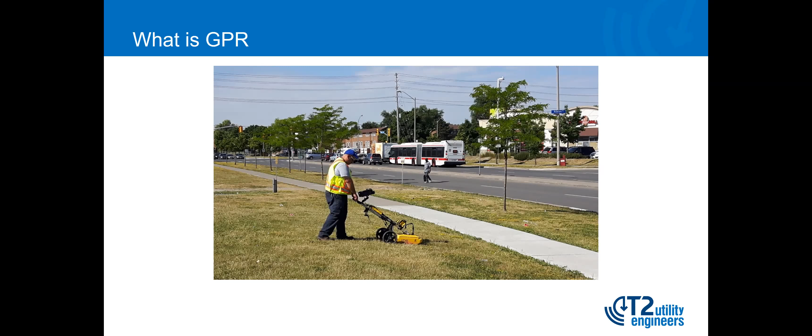That's what we've used in the past, and we still use it to this day. They're very good, there's all different types of models, they're all changing all the time. But typically they're a push system where the data is collected and usually interpreted real time, right in the field. So as you're pushing, if you saw something, the data would be interpreted there and looked at right in the field.

So like I mentioned, it goes through and does metallic and non-metallic infrastructure, natural man-made underground features it can pick up, which would include utilities, which are a big portion of what we do, but also storage tanks, rebar, sinkholes, voids. If you're looking for water table or any environmental contaminants, buried artifacts, grave sites, pretty much anything that's subsurface or in the shallow subsurface, we can do.

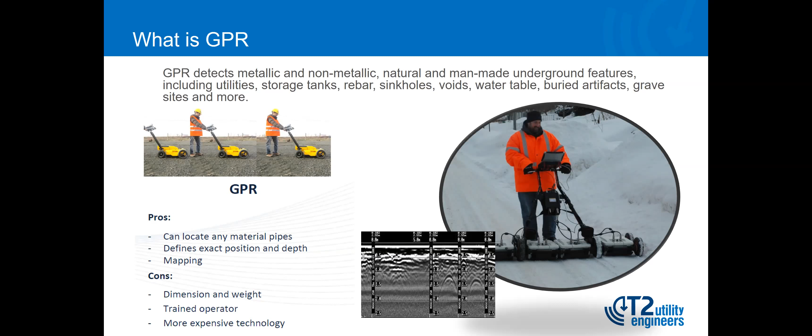So this is the standard 2D GPR that we'd use on a day-to-day basis to help us find utilities or underground infrastructure. I'm just trying to replicate here some of the fundamentals of GPR, because we utilize this all the way through for our single channel, multi-channel, and mapping purposes. I wanted to give everybody a bit of background on GPR in case you hadn't heard of it or seen it before.

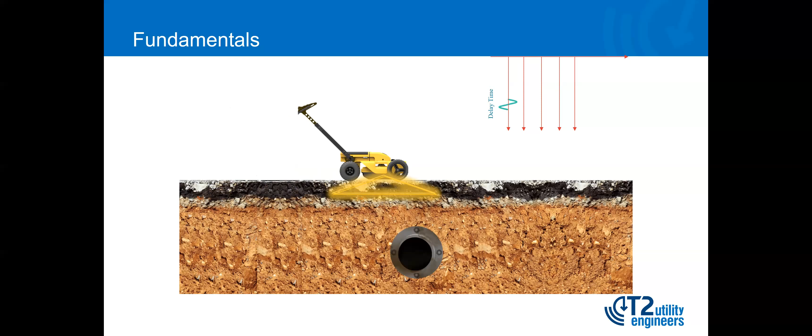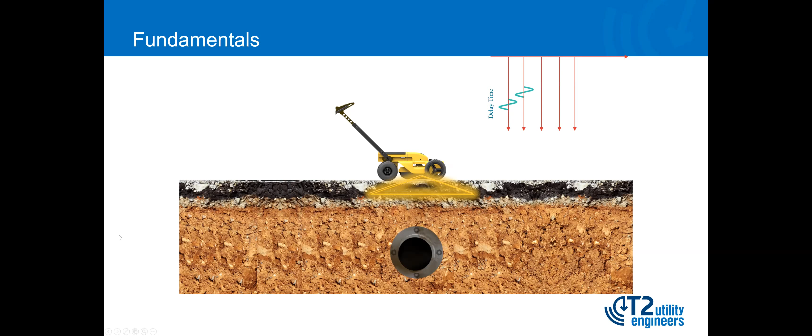As you can see, the typical push model is you push the GPR system across the ground. Sometimes it's very easy on flat surfaces, but other times it can be very difficult. As the transmitter sends out its signal and the receiver receives the reflections back, as you slowly come over the utility or whatever you're looking for underground, it creates these waves and markers on the screen. As you keep going back and forth pushing the GPR, you eventually try to see these hyperbolas, and that's what we're looking at with GPR data.

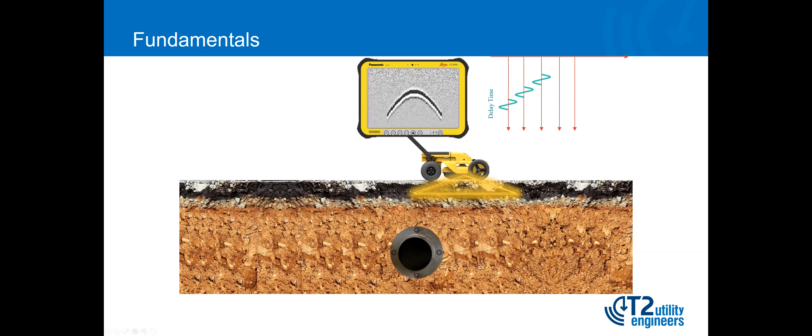So when we go back to what we would use as standard GPR in the field on an everyday basis, it really comes down to the person utilizing the GPR and their interpretation of the data in real time. These are great if you need to do utility locates or help find utilities quickly in the field. As long as the conditions work for it, they're great for that. They're quick, you can pull it out, push it along, and try to map out the utilities. That's the data you're looking for in the middle of the screen.

It's these upside down hyperbolas, and believe me, if they all looked that nice it'd be great, but typically they don't. So it really comes down to that interpretation, and it's always been a bit of a concern when mapping bigger areas or in roadways where you need time for that interpretation in between cars, traffic, and even pedestrians around you.

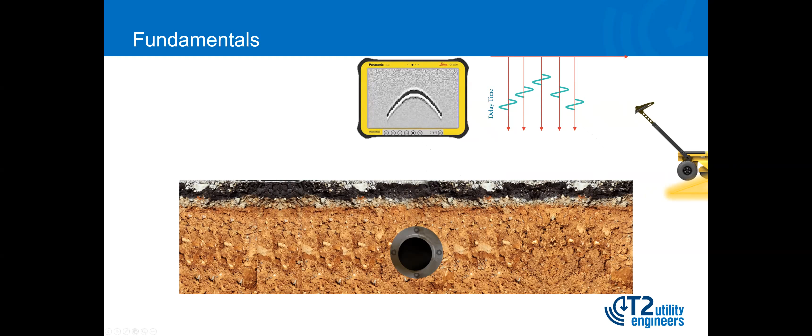So again, here you can see some of the standard GPR data that we look at in the field when you do it real time. This is great data, and I'd love to see this data all the time, but that's not really the case. To show the point, if you're doing the interpretation in the field real time, you need the time to look at it, do your interpretation, move back, and figure out where it is that you're seeing. Would all of these be utilities? Could they be some utilities, some buried infrastructure, rocks, or anything in the subsurface that could give you that reflection? All of that can give you this data.

So when you're in the field trying to do it real time, it can get quite difficult and time consuming to map a bigger area when you're out there doing it. This is the data we're looking at, what we call GPR data, so you all have an understanding of what it is. Again, it comes back to it being a bit of a slower acquisition with the normal push GPR systems. It's good for certain applications and in certain areas, maybe smaller areas, but it's very prone to that interpretation. Most of the time, I'd say the majority of these systems out there are used for utility detection.

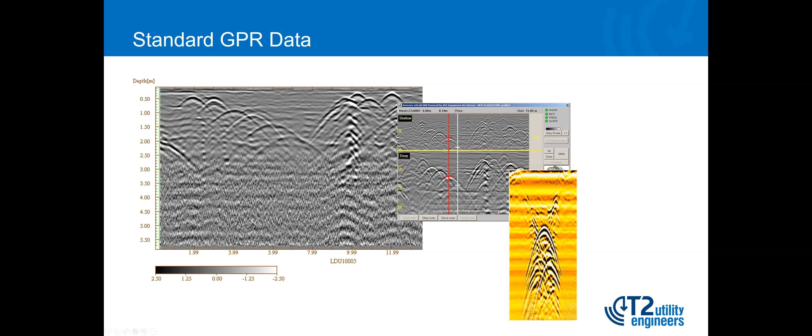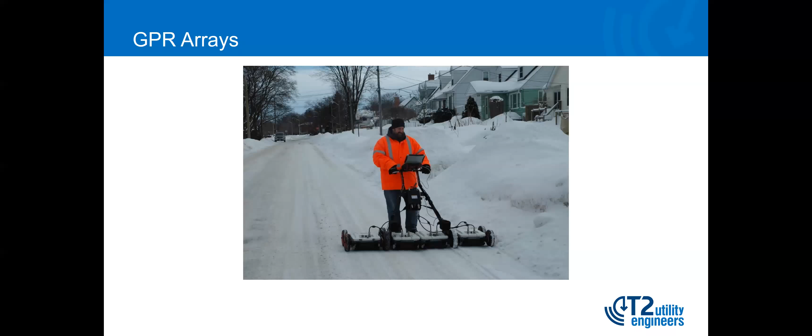You can see we did it in the winter. These systems don't really like the winter temperatures very much. I think back on this day, our batteries froze, the screen froze, and everything else froze on us, trying to put it to the limits. But we're trying to take it a step further so we can really start to map this area quicker and have more information coming in.

And again, here it is in the summer, same idea. We're trying to expand the system into four systems to collect more data, make it more efficient in the field, and see what we can get with it. So this is us moving from the single channel, the smaller systems, more into an array system so that we can collect more data. And from here is where we're going to go now into the multi-channel.

But I just wanted to give you that bit of background information on GPR. So when I say GPR or transmitter receiver, you have a background in the information I'm going to be utilizing here. If you have any questions or concerns, hopefully ask them at the end or reach out to me and I can help you out, but I didn't want to drone on with just the background information of GPR in general.

I want to get into what makes it exciting for me, going into the more multi-channel and how we're really utilizing this now on our day-to-day projects, and maybe really where it can help out on different right-of-way information and what we can do.

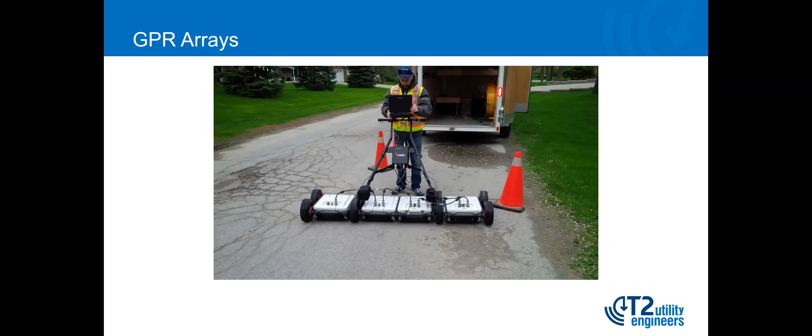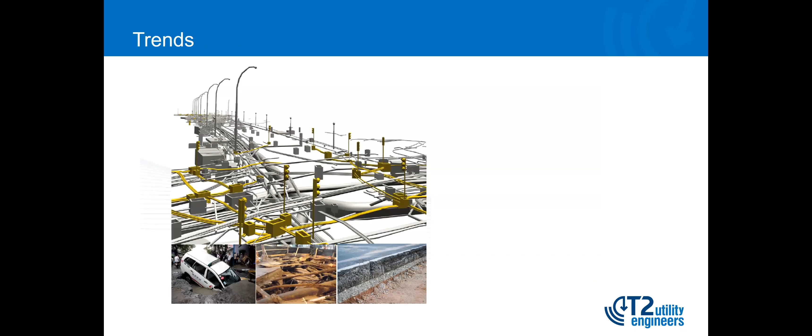With the single channel or the smaller systems, it's great for real time. You can mark it in the field, put paint on the ground, bring that data back, and maybe interpret it a little bit, but at the end of the day, it's really just a real-time system.

By us trying to move to these arrays or these bigger multi-channel systems, it really is going to help more with as-built situations where we're looking to find all pipes and cables, not just a singular one, not trying to find this plastic water main that's out there.

We can definitely use it for utility planning, road maintenance, and renewal. So if you need to figure out if there's voids, how deep the road base is, or if there's a concrete road base or anything like that. It comes down to safety and if there's any cavities in the road, and if there's any other underground assets and conditions.

This is kind of where I like to go - there's a lot of abandoned utilities out there, abandoned structures, even infrastructure like old train tracks, tanks, or building foundations that have been buried. All this type of stuff could be out in these easements or right-of-ways that we have, but we don't really know about it. Our typical electromagnetic day-to-day locating techniques maybe will not find them, or they'll find them but it's very hard to interpret what this data would be.

So we're trying to take it from the one side to the other. As part of a process, as part of a tool in our toolbox, we're really trying to bring out a different area where we can take this information.

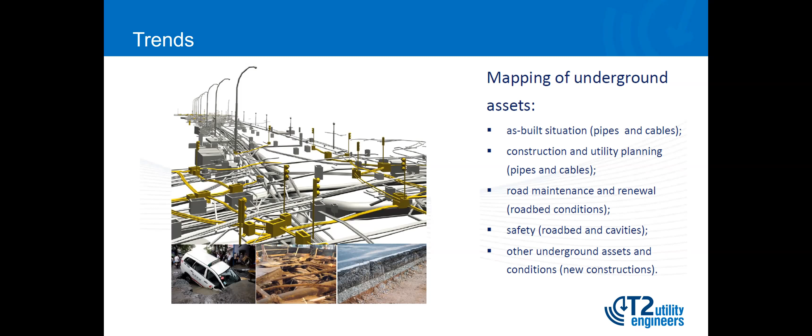So going from typical GPR and that small system we push, to what is multi-channel GPR, MCGPR as I might call it. What is it? We've gone from this small system to maybe a bit of an array, to now a system that is a tow-behind, big system. There are different variables out there, smaller systems you can push, but really we're trying to get a system big enough that we can collect all this information as we're traveling down the road, in one pass.

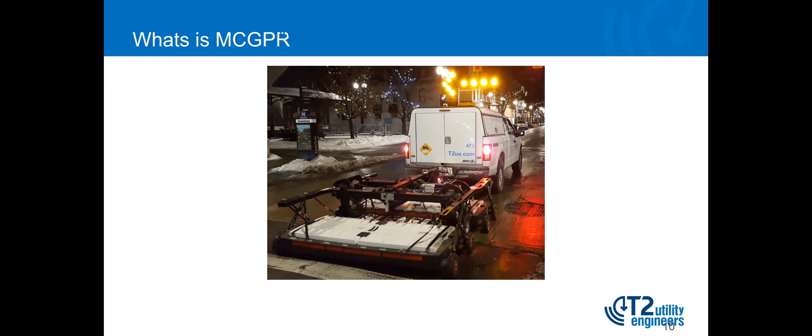So this system you can look at here is a multi-channel system. It's got 40 channels, where the typical small push ones are probably 1 to 2 channels, and it has different frequency antennas—200 and 600—collecting data in both directions. So as this system drives down the road, we're collecting data in that full swath with multi-frequency antennas, as well as in different directions.

The whole idea is for us to collect as we're going down the road, or across a piece of land, in just one pass. It's collecting in both directions for us, and then we're done with it. We can turn around and collect the other side of the road. So from an efficiency standpoint in the field, it definitely picks up—we can collect a lot more data a lot faster, and we don't have to go back and forth. With the older systems, we'd have to go back and forth parallel to the road and then across it. So something we can now collect in maybe an hour might have taken us days to get the same data.

So those are the bigger systems. Again, you can have GPS connected to them, which allows real-time acquisition of where you are. It lets you take the data and put it into GIS, and from GIS you can put it into CAD. We can relate it to different datums, into KMZ files—we can do a lot with it as long as we're collecting this. So there's a lot of information going on and being collected at this point.

And just to show you a smaller system—this is a smaller, again multi-channel system, I think 32 or 34 channels, again with different frequencies within it. This one's a tow-behind as well, and you can push it, tow it, and collect data with GPS and everything else. So it's the same idea.

It depends on what we're going to do. Maybe some of these we'll use on the roadway or big land areas, where these smaller systems will get us closer to buildings, or on sidewalks, or in different areas. So again, everything comes down to what the scenario holds and what you feel you need to use for that scenario. But the whole idea is this array system with different multi-channels and multi-frequencies collecting in all different directions.

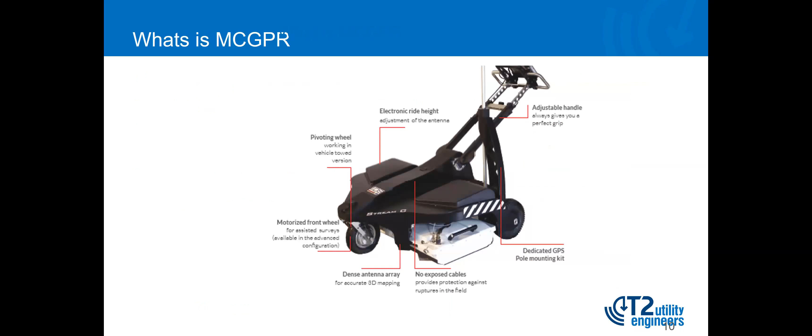So again, what is multi-channel? It's like I've talked about—arrays of multi-frequencies, I've got 200 and 600 here, but there are many others out there. It's a massive array compared to that one single push system. There are different types that can be towed and pushed, and the key is that you're gathering a ton of information quickly, and you only have to do it in one direction, where in the past we'd have to collect data in two directions or multiple directions. Now we can just travel down the road and collect data as we go.

The one system, the big system you're looking at, is almost the width of a vehicle. So to do a laneway of road, now you're maybe doing 2 swaths down that road, where we'd have to do multiple passes in the past to accomplish that.

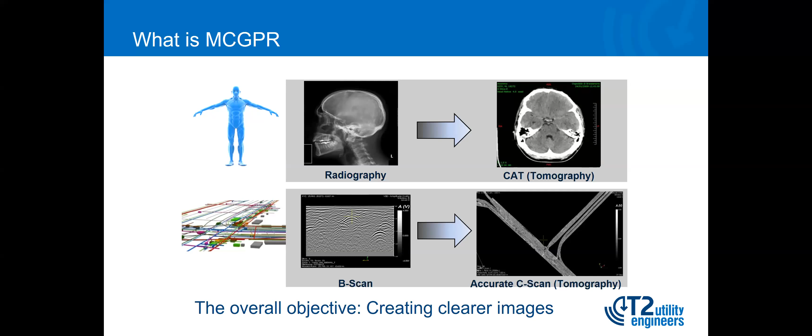So like I keep mentioning, we're really trying to take it from the 2-dimensional world, or the 2D of what we normally collect, to the 3D. And what we can do with these array systems, it really comes down to the collection part of it, which is fairly simple. It's a big system and you have to understand how to put it together, but the collection of the data, because now you're not really doing the interpretation in the field, it's not real time, you're now doing all this data post-processing.

So that's where now there's definitely more time in the office than what there used to be, but the product itself is pretty amazing. Now we can go from these two-dimensional ideas all the way through to three-dimensional pipe detection or structure detection as we go, and we can create these overall tomographies as we do it.

So we're still utilizing GPR data itself. It hasn't changed. We're still looking for those hyperbolas and trying to connect them together, but because we have this multitude of data, it's allowing us to create these better tomographies and this better information, actually produce this 3D information that we can then use in CAD drawings, we can use in KMZs, we can use it anywhere to create what we need. We can even put it into a GIS program for certain things.

So it's really working out well, is getting all this information. And what I mean by that is what it allows us to do. Again, this is all data interpretation that we're still utilizing from these multi-channels. But now we can start to pick points.

You can see the top version is the data itself. So we're still using GPR data. But with the software and the processing software, we can start to pick these points, put information, start throwing 3D and elevations as we go. So you can see here, this is a utility that's coming to a cross street. It's dipping down to get through the intersection, then comes back up on the other side. And we can start to do this and actually export this data as a 3D model.

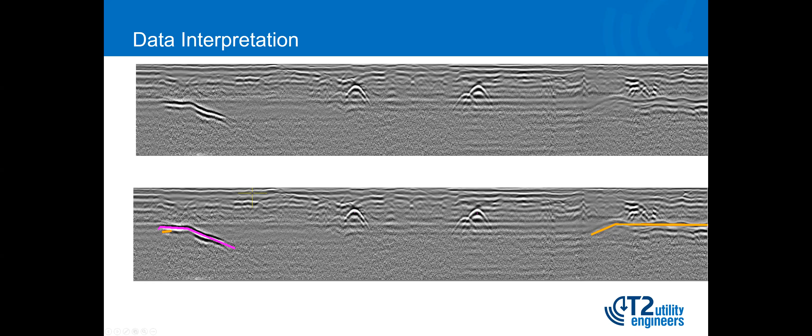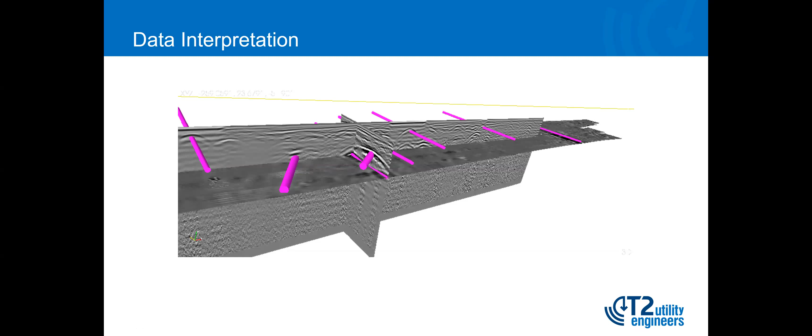So you can see here just a basic set of information. But now we can start picking out pipes or different utilities and actually exporting those picked points out into something that's very usable, into a CAD file or into whatever information that you need to utilize it in, and really helps with the planning and processing to really know what's out there to gather that information. So it's really come a long way with that.

If you're doing a complete SUE investigation, it might be that you'd want to use the multi-channel to help out. Especially it allows you to get out into live traffic. You can collect data day or night. Vehicles and that type of thing don't really affect it very much, so you can really get out in this live data, this live traffic, and be safe. But there might be some other ideas where you might not take it this far. But then if you're going right through to a 3D model, this really helps correlate the data and bring it back if you're doing test holes and that whole type of thing.

So that's kind of the data set that you would see and utilize to create different things, and I'm going to slowly go into that now. So what are we going to look at? What's the kind of data that we can receive from it, and then really what we can do with that data.

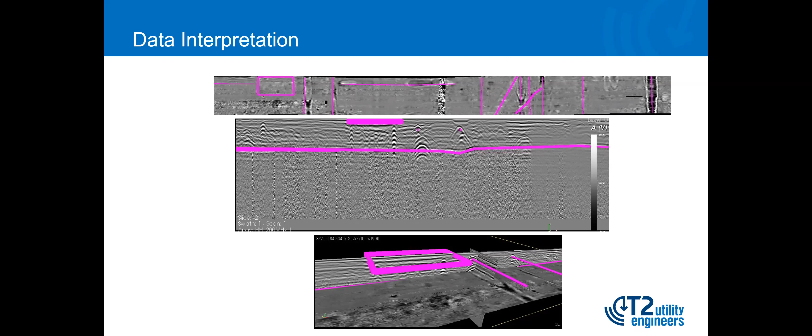I'm just going to jump in here. I feel bad because I can't see anybody's faces or understand how it's going, but I've got to keep going through here and hope for the best on this.

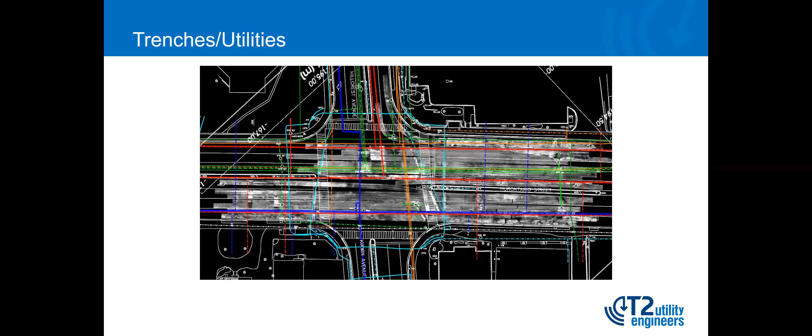So you can really start to pull this information together and see it - it kind of gives you that big picture idea of what we're doing. I'm trying to now relate it back to some live examples of information that we do. From those last couple examples, it really helps with utility specific information and what we can do with it. And how that works is you can see on these ones, again, we've overlaid a base file.

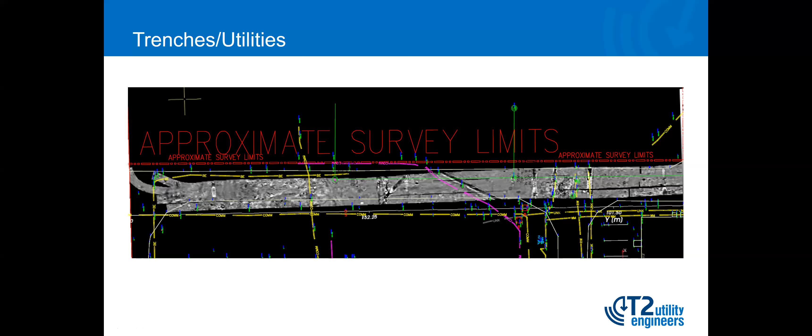We have existing utilities and records, and now we start pulling the information in. You can see we just got an image, it's georeferenced correctly, and a lot of the utilities we did get, no problem. But now we can start to see areas where we didn't see these ones, and maybe we can realign this based on the electromagnetics. Maybe something was causing a change in the electromagnetics there, our normal pipe and cable locators. So now we can really start to develop and key in on showing the full potential of what's out there.

So then it's the same image again, but we're adding in different lines. We're confirming locations, maybe repositioning locations based on what we know, adding total areas that we had no idea about, non-conductive, abandoned utilities that are out there, and taking it from there. So from a utility side, it really is a tool that helps us to develop this overall map of what's there and what we can do with it. It's kind of key for us on that.

So that's the one part - it can help us with our utilities, abandoned or alive, in our areas and what we need to do. Another big thing though, what I find with the multi-channel, or what it's doing with these array systems, is the non-utility infrastructure that it's finding.

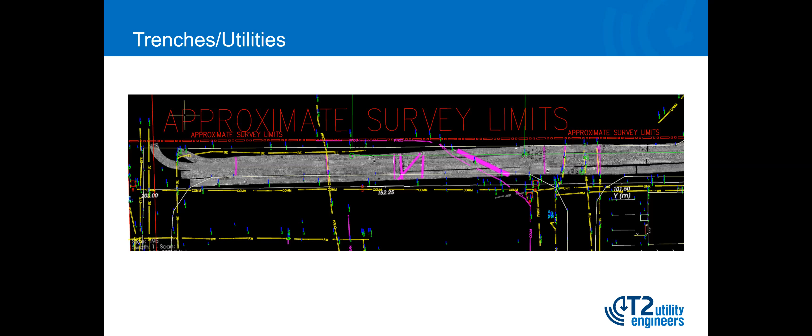So one of the things I'm a little proud of on the different jobs I've done - and it's really nothing to do with me, just by chance and luck that I'm in the right spot at the right time - is really looking for tracks. It's funny with the amount of jobs I've done over the years, and looking back and doing research based on the information I find, is how many locations or cities have at one point in time or the other had old trolley tracks that over the years have been buried and abandoned and just paved over. At the point in time when the road went in, they didn't feel it was needed to take out. So you start to get this information.

So here's a job that we did, and it's just a little section you can see in the middle, and I'll put it on. Again, the same thing is we can bring this image in - there's a topo that goes with it. And now we can start to see that they've had to do some work on one side or the other, but there's a set of tracks that are buried within the roadway.

It might - if you don't do anything in that roadway, that's fine, they can sit there, they're not causing voids or anything. But once you go and start to dig or come across those, it's going to be huge downtime and costs at a later point. So knowing that they're there up front, maybe you totally change your design or plan.

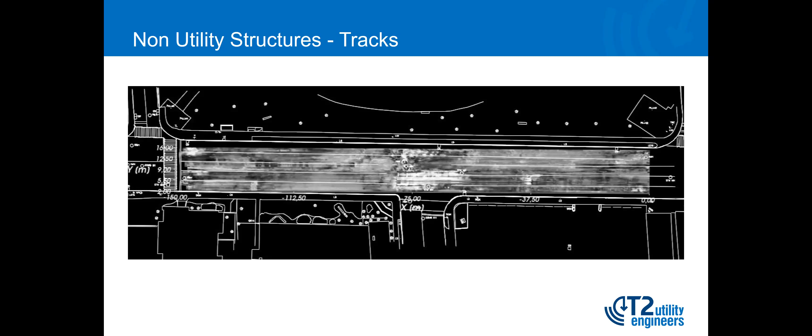So again, just going through some different ones - here is a section where you can definitely see the tracks. I think in this one we can see the ties, and the track itself was still there. It related back to when we were doing our normal electromagnetics, because we had a couple of unknowns where the actual tracks themselves were as we went through, but we would never have known the beds, or even if that was a railway track at that point or a trolley track.

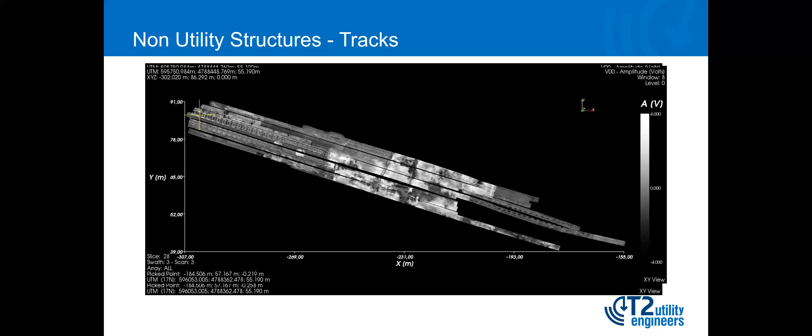And again, here you can kind of see they're on one side of the road versus the other, and all this information can be overlaid within the drawing. So I'm just putting through the depth slices, and then what we do is bring that image right in and put it on top. So now you can see there was definitely trolley tracks in the middle of the road - you'd never know that going out there now.

And when they put the cross street in, they dug them out and removed them, but they didn't have to remove the other portions of it. So finding this information when we're out there is really key. And so where I said in the beginning, I've been lucky to be on the right job at the right time - there's probably more of these out there than we even hazard to guess.

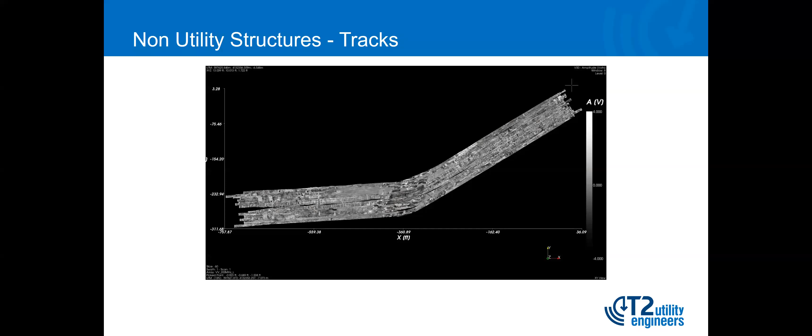But you can definitely see, again, here's tracks right in the middle - they're going right down, you can definitely see them. They're still even over top of the big culverts and bridges they have in the middle of the screen there. And then when it goes out, they've got them there.

So now they know there's an upfront cost for the removal and disposal of these tracks that they would never have known about from any design or planning point of view, other than if you've got someone, say Fred, just retired, who remembers the trolley tracks are there. But the majority of the time, people don't realize they're still there under the ground.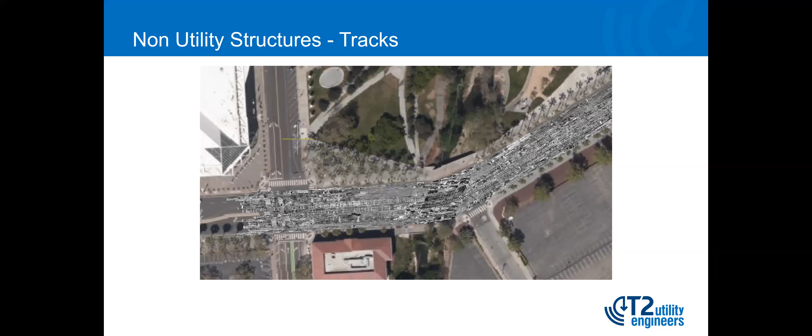So this is just one last one I'd like to show. I found the two sets of tracks, no problem. You'd never know this. I was doing some research because I like to find out for myself, and there's an image of the same area showing it back in the day. They even used horse-drawn trolley tracks, and that was the setup - that's what we're actually seeing in the picture.

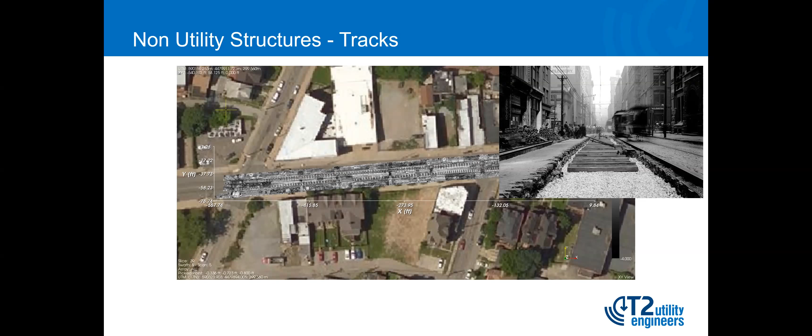So even with the multi-channel now, it's allowing us to create these maps, these overall drawings that really dictate and show what's out in the middle of these roadways or right-of-ways, to really help us plan that going forward, so we know up front.

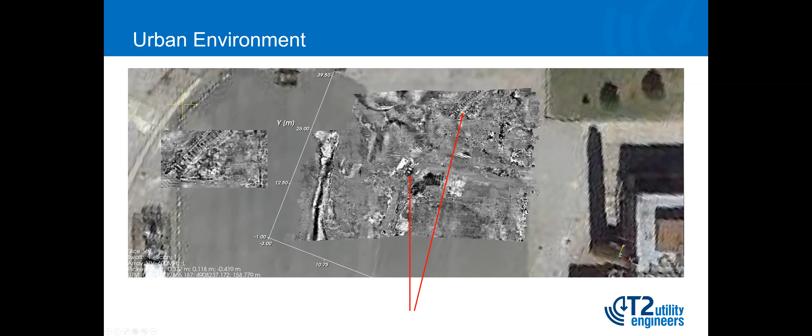This is one that was very interesting to me. I gathered a lot of data that was given to me. It's actually mapping old cemeteries that have been in place that maybe have been removed or we're not sure of. With typical GPR, the amount of time it would take to collect this data would be substantial, where now we're down to hours to collect the data and then process it. So this is just one instance, for example. We do quite a few of these, trying to map out old graveyards.

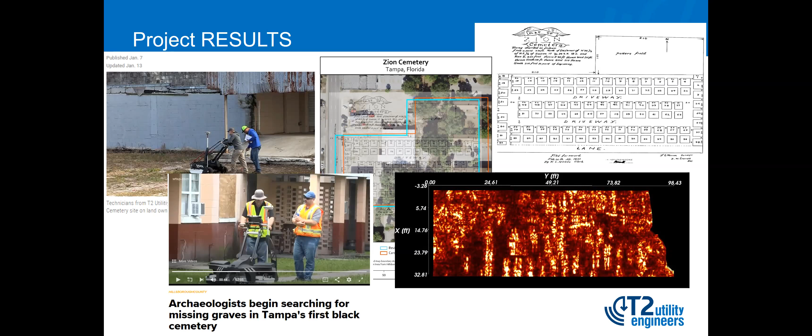This is on sites where there's buildings, or over the years things have changed, and infrastructure has been built up all around because people didn't know it was there. Throughout time, they figured out there's a location, or maybe something going on here, maybe we should look. So we're utilizing the multi-channel and then actually putting it in with LiDAR, trying to develop full models that people can use.

It's pretty amazing what you can see and what you can get from this information. I always feel weird doing those old gravesite ones or cemeteries, because it's just always a little different - if you find it, it's never good. So it's a different situation.

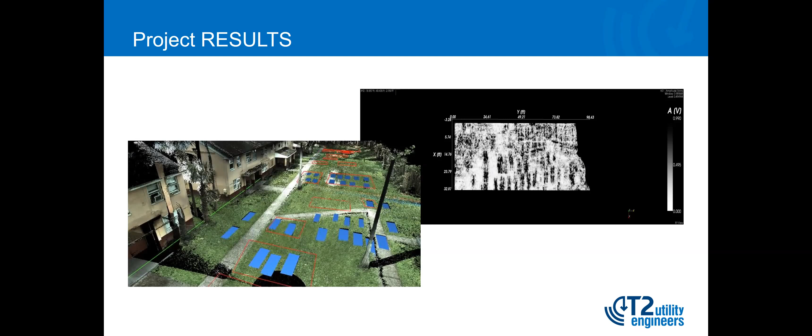And I'm going to leave on this one. This is a whole project I'd like to go through. It's data that was collected for us actually down in Vegas. And of course Vegas is always lights and showy, but we were able to get a lot of good information from this one.

So that's why I like to show you this, let's be honest - maybe not so much now during our COVID era, but during normal times, the amount of people traffic, foot traffic, vehicle traffic, just everything going on down in Vegas was really hard to figure out what we were going to do. So we were there to map everything that's in the right of way. You start off with the electrical, do your records research, do your electromagnetic, typical pipe and cable locating.

But it's very hard to figure out everything that's in there. You're having to go at weird times of the day - the amount of people and vehicles made it unsafe to try to do that. So that's where I go back to what I was saying before - you almost focus in on what you know is there versus really trying to look for everything that's out there.

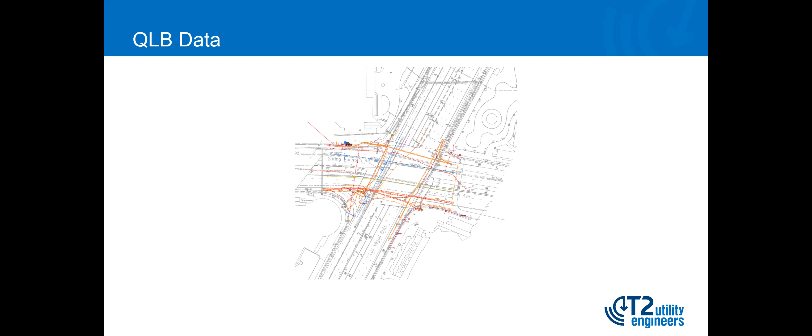So then we brought in the multi-channel and we thought, okay, how do we make this better? So again, the same idea - here's what we did in the past. It's a huge intersection, I think it was like 6 lanes in either way. So quite a few paths to get it, but it wasn't even a night of collection, it went fairly quickly for us. We were able to collect the data, so it just shows the outline of the collection areas that we went.

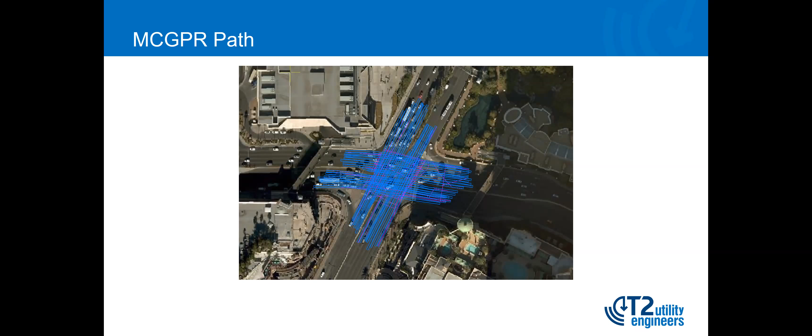Trying to pull this all together as information to be as safe as possible. So now it's the same intersection, going back to those depth slices that I showed you earlier. As you go down through, now you can really start to pull the information together. I'll probably try to run this twice, but you can see these are different slices going down through the earth, if you want to say, at different depths. You can see different utilities coming through, different structures, different abilities to see information - a lot of information that we would have never got or received before.

And what we started to figure out is there's a lot of abandoned infrastructure in Vegas. They just kind of put in new, and I didn't think there would be much in this area because typically in Vegas they put a lot on the side streets, not down Vegas Boulevard, but over the years a lot of information went through.

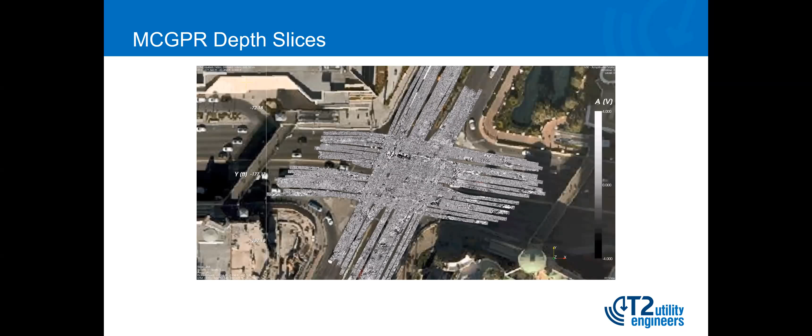So this is just one component of what we developed to help us pull these drawings together and get this information. You can see here, we start to pull this information together and it really gives us that overall map of the area utilized with our pipe and cable locators, because that allows us to depict whether this is a water main, a sewer, or a gas line, whereas with typical GPR data, we'll never know what it is. We would just know that there's something there. So it's definitely a tool to use hand in hand with it, which allows us to get through.

And then the end product is, this is with QLD with the record information right through to our QLB and the multi-channel. You can see there's a lot of information that we never would have even known was there from beforehand.

Just based on the pipe and cable locator and the records information, our end product now as we put it out shows all the information we received from the pipe and cable locators, plus a lot of unknown information we didn't even know was out there, but we were able to find now or put through, so further investigation can take place to help with that overall deliverable.

So I've hopefully taken you through single channel, the normal 2D interpretation in the field, right through the multi-channel, and how it's really not all about utilities. It definitely helps with that and what you're trying to find out there, but it really helps when trying to find all the unknown structures, like everything from tanks to graves, to abandoned utilities, abandoned infrastructure, just even to garbage and debris. It really helps bring that all through.

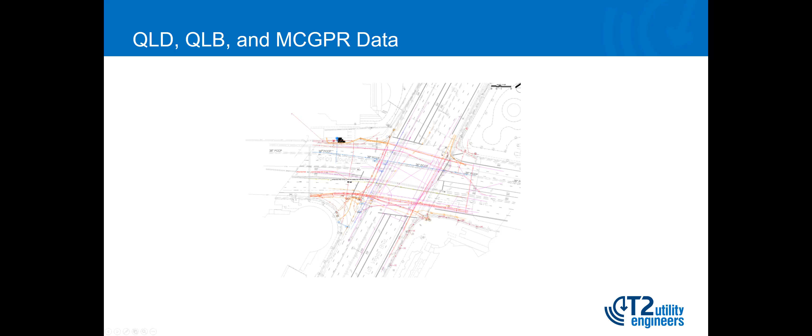So hopefully I was able to get through that for you today and answer some of those questions. Like I said at the end, some of the benefits we're finding with utilizing this information is it's a great double check of information. You can put those screenshots or depth slices right on top and start to QC whatever it is you're looking for, from tree roots right through to utilities.

It'll help you align and further find stuff that was maybe never found in that base investigation. It's an independent evaluation - what I mean by that is it's not biased, it's not the person in the field. We're just collecting the data, and then we can do the interpretation and processing behind it. And it really helps with the elevation and collaborating if you're doing test hole information on depth, because you can really get depth information from this and take it from there.